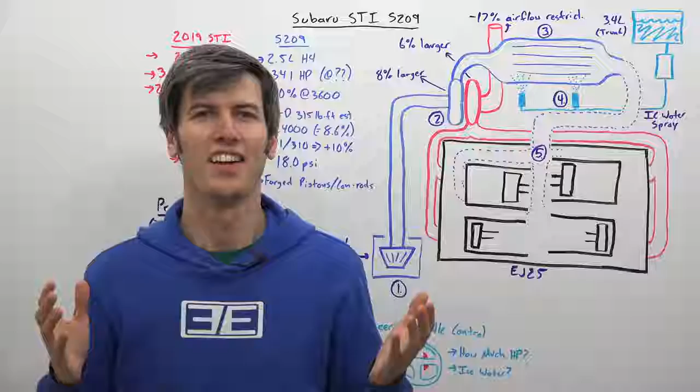In this video we are talking about the Subaru STI S209. Finally the US market gets one of the good ones. This is the first time an S-Line product has been made exclusively for the US market. There's going to be about 200 of these made for the US market, Subaru STI S209.

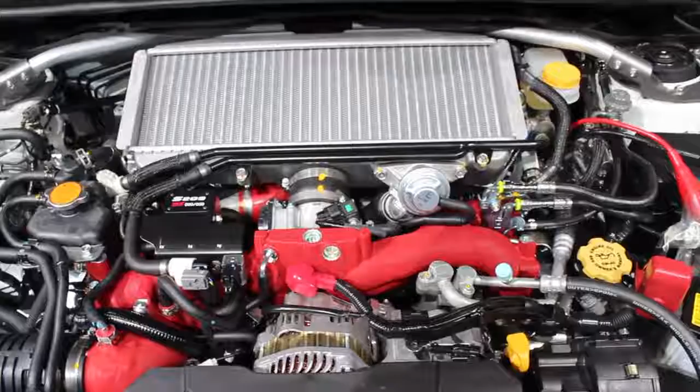In this video, we're going to be talking about how the engine works, what changes they've made with it, and also getting into its water injection system for the intercooler, which is a pretty neat little thing that they did. It's also something that they did in the 2004 to 2007 Subaru STI. So cool that they have brought it back for this special edition S-Line S209.

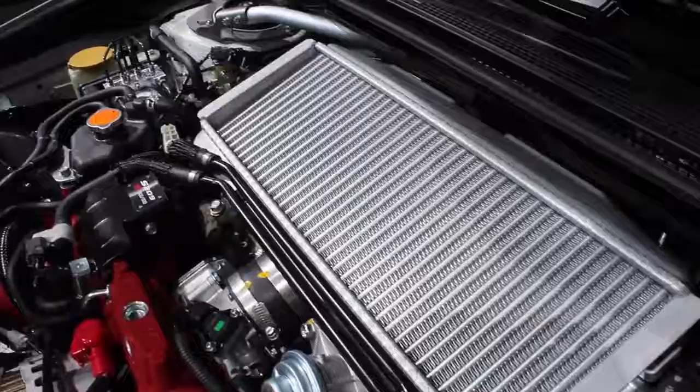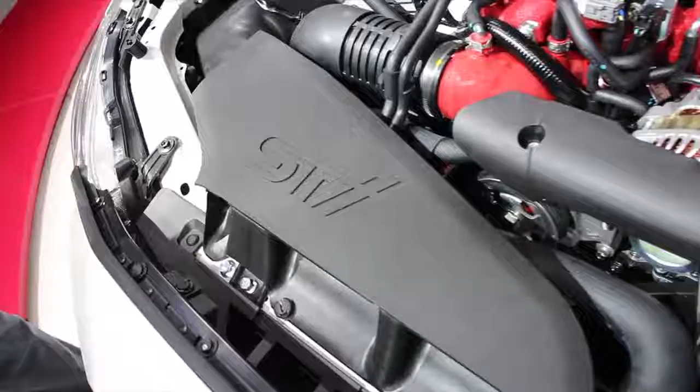The engine is based on the same EJ25 platform. You've likely formed an opinion about it. The engine has been around for quite some time, but of course it is that 2.5 liter boxer engine, and you've got your 4 cylinders right here as you can see, but they have made some significant changes to this engine. So up at the front you've got a conical air filter and a new induction box.

That leads you back to a compressor which is now 8% larger. You also have a 6% larger turbine, and out the exhaust the mufflers have a 17% reduction in airflow restriction. And they've also, of course, added this water injection system. After passing through that intercooler, the air is distributed in the intake manifold between the 4 cylinders.

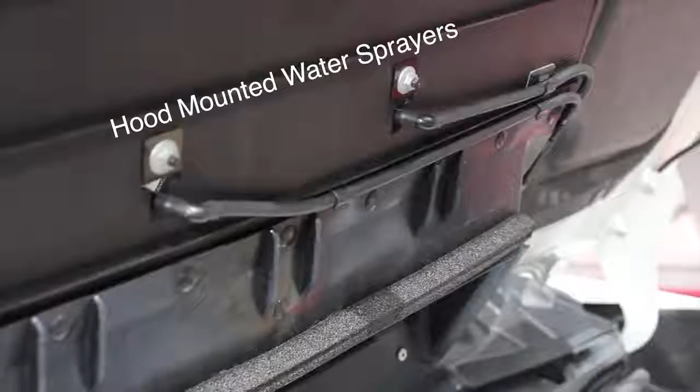Comparing the specs between the base 2019 STI and the S209, both of them, of course, have the 2.5 liter boxer 4-cylinder engine. However, the 2019 STI is at 310 horsepower at 6,000 RPM, the S209 with 341 horsepower, an additional 10%, or 31 horsepower. They have not yet provided at what RPM that will be at. I will get into that in just a second.

The 2019 STI is at 290 pound-feet from 4,000 RPM to 5,200 RPM. And the only thing we have learned so far about the S209 is that it has an increase in the mid-range of about 10% at 3,600 RPM.

Now, Car and Driver has said that Subaru estimates the peak torque for the S209 will be 315 pound-feet, and if we were to assume that this was at 4,000 RPM, that'd be an increase of about 8.6%, so somewhat in line with what Subaru has stated of 10% at 3,600 RPM.

And then, of course, the 341 horsepower divided by the 310, giving us an increase of 10% power. So I might guess that, if the torque does taper off towards that higher RPM, then we may see this 341 horsepower at a slightly higher RPM than 6,000.

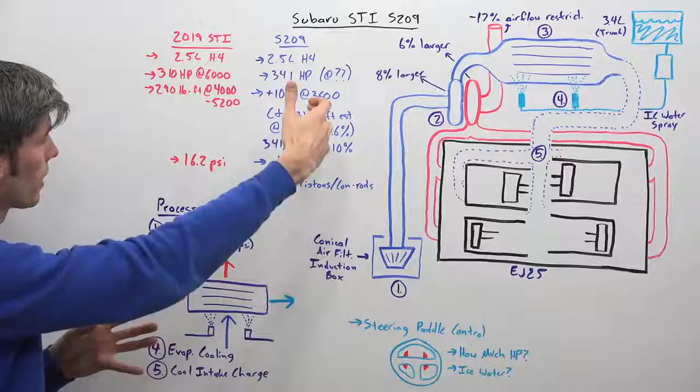Now, how is it creating this additional power? Well, part of it is through using this larger turbocharger and having more boost. So it's running at 18 psi versus 16.2 for the 2019 STI. And another big benefit that the S209 has is that it has forged pistons and forged connecting rods, so not only are they lighter, but they are also significantly stronger.

All right, so let's chat about the intercooler water spray, because this is quite neat. The process goes: you've got your air, it comes in that filter up front, it's then compressed by the turbocharger, adds 18 psi of pressure to that air over atmospheric. That air is, of course, then heated up as it has been compressed from that compressor and then travels into your intercooler.

An interesting thing that Subaru does with their intercoolers is placing them up top, using an air-to-air intercooler. This way they get some of the benefits of an air-to-water intercooler and some of an air-to-air intercooler. Placement for air-to-water intercoolers is very good because you can put it back in the engine, and as you can see, the air comes in through this intake, passes into the turbocharger, and then immediately can be directed into that intercooler above the engine, rather than routing that air all the way back to the front. This helps reduce turbo lag by shortening the path that air has to travel.

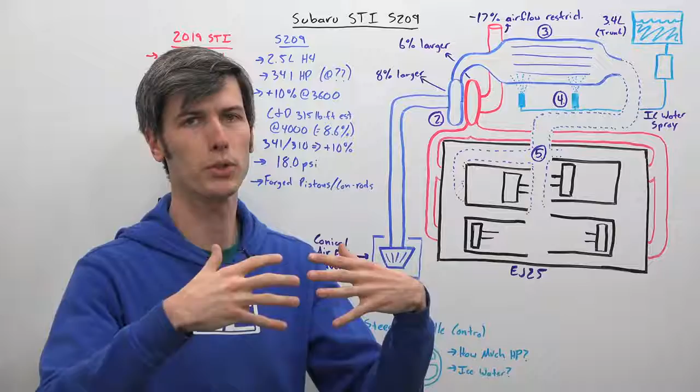You also have the efficiency benefits of an air-to-air intercooler. Even though it's not at the front of the engine, which would be ideal from an efficiency standpoint, you're still reliant on ambient air to cool that. So the minimum air temperature you could get would be ambient air, versus an air-to-water intercooler system, where your minimum temperature would be dependent on the water temperature, which would be slightly higher than ambient.

That compressed air is cooled as it travels through this intercooler, and then you have a driver-controlled option, a paddle on the steering wheel, to spray water onto the intercooler and use evaporative cooling to help bring down that intake temperature even lower. So if you're looking at your hot air going into the intercooler, you have cool ambient air going across the intercooler, which is then being heated up.

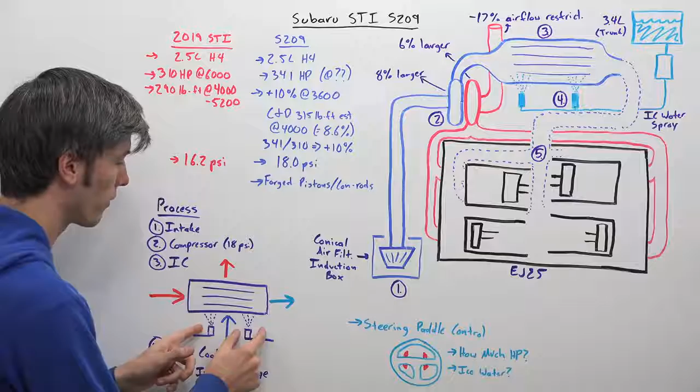You also have these two water injectors spraying water onto the intercooler. Through evaporative cooling, the heat of that intake charge heats up that water and evaporates it away, cooling the air even further. So you bring down that air temperature and distribute it into the intake manifold between the cylinders, sending in a nice, cool, dense, oxygen-rich charge, because you've improved the density by dropping down the temperature, so you can inject more fuel and thus make more power.

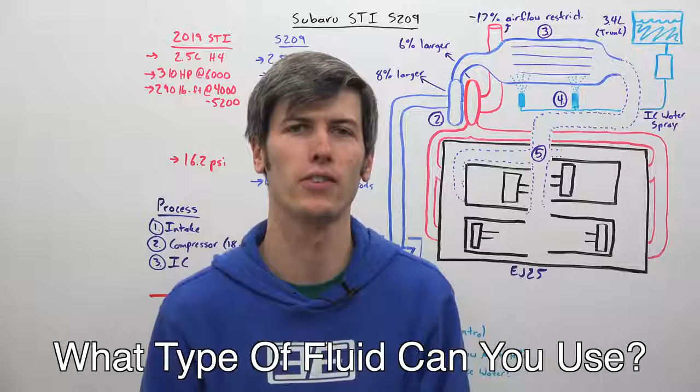I had a few questions about this system, so I reached out to Subaru to learn more. The first was, what type of fluid can you use with this system? Subaru plans for you to be able to use just any old regular water. I asked about this, and they said STI is looking into the fact that every state has differing water quality, and it seems they do want to let you use whatever water you want, though if you go back and look at the 2007 STI Owner's Manual, it does specify that you only use pure water. My next question was, what happens to the system at temperatures below freezing?

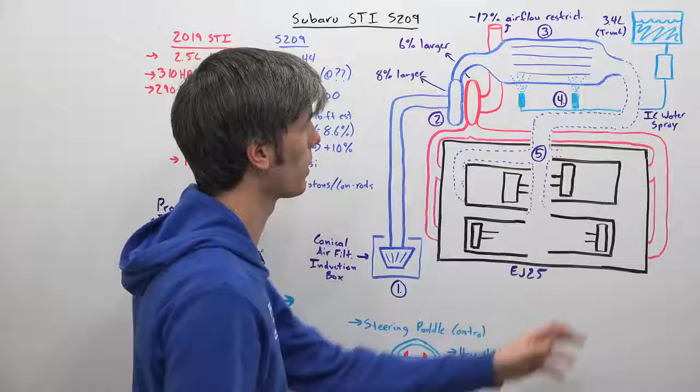The convenient thing about this is, if you're driving in temperatures below freezing, you don't need the system to work, because your ambient air is going to be so cold that your intercooler is going to be very efficient. That cold ambient air is going to be able to drop that intake charge temperature quite a bit, so you don't need to rely on this water cooling system in order for that peak performance to happen. That's the good news about it.

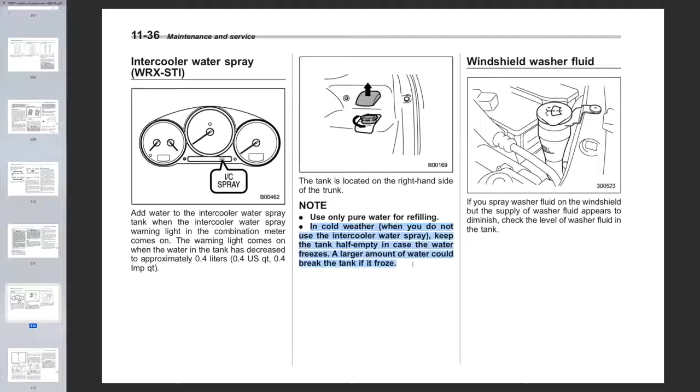As far as precautions, Subaru says you'll want to keep the tank half empty, half full for the optimists out there, so there's plenty of room for that water to expand. They said that if you use more than a half full tank of water, you could actually crack the case that the water is sitting in. So you want to make sure it's at just half full if temperatures are getting very cold. Also, the lines for the water injectors are rubber, so they do have the ability to expand if that water within them were to freeze.

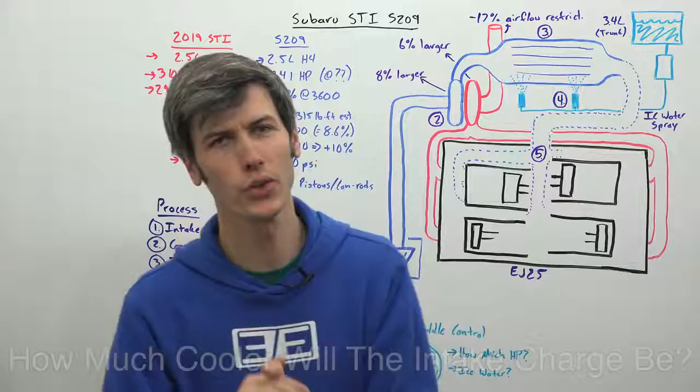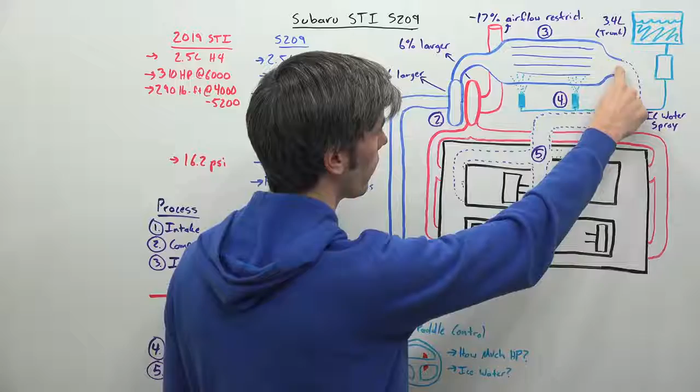How much cooler will the intercooler spray actually cool down that intake charge? I don't have a definite answer, but Subaru told me they were targeting a drop of 10 degrees Celsius. So if the water was on, the temperature exiting the intercooler would be 10 degrees Celsius cooler than without the spray system.

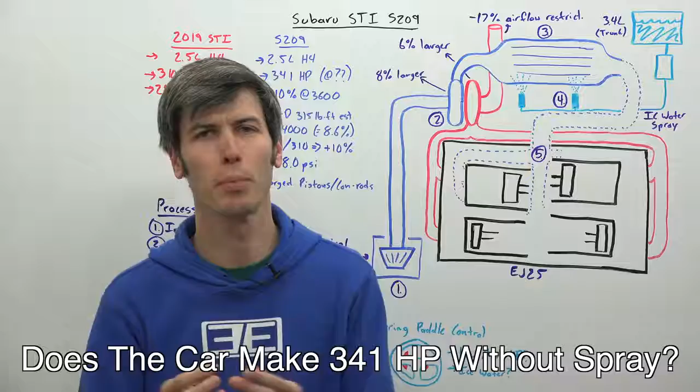Next, will the car be rated for 341 horsepower without the intercooler spray? The answer is no, and this is pretty interesting. It comes down to how the testing is done in certifying an engine for its horsepower rating.

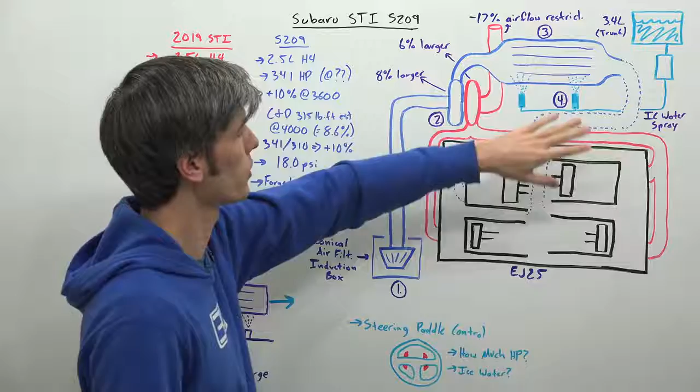You might be thinking, wait a minute, if in cold temperatures the car can make peak power because ambient temperatures are low enough that you don't need the water spray system, then why would you see an increase in performance using the intercooler spray for the published power numbers?

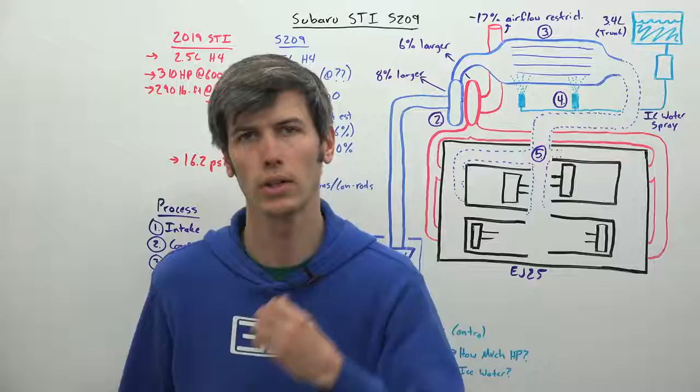When engines are certified for their power using SAE standard J1349, the testing is done at 77 degrees Fahrenheit, or 25 degrees Celsius. At this temperature, the intercooler spray actually has a meaningful effect in increasing horsepower. Subaru didn't say how much, but they said without the intercooler spray, it would be rated for slightly less horsepower.

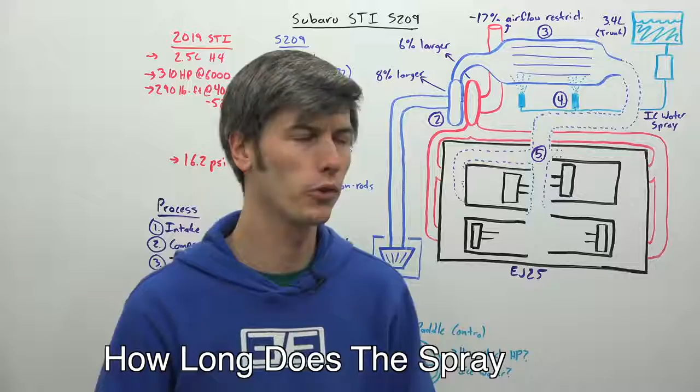Finally, how long does the water spray last? Subaru said there's a 3.4 liter tank placed in the trunk, with a water pump sending water up to the injectors. They said it will last 5.5 minutes, or 330 seconds, as the maximum operational duration for this system.

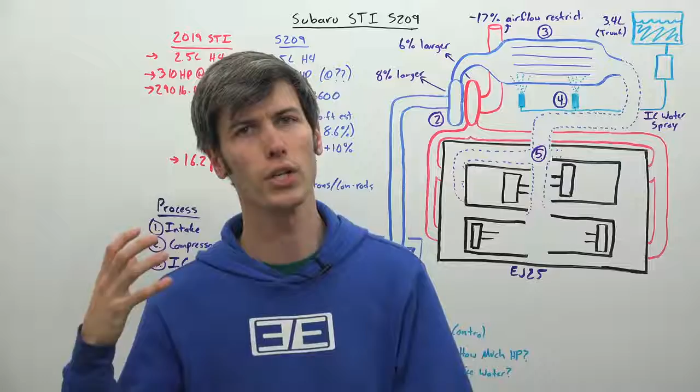If you do the math and assume that 5.5 minutes drains the entire tank, that means you're injecting about a liter of water every 100 seconds.

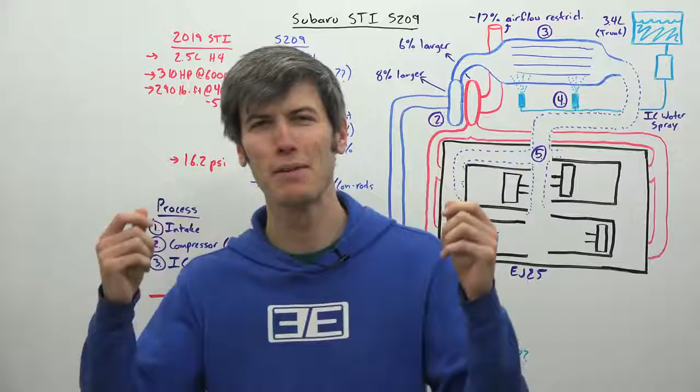On the car, you've got little paddle shifters. Of course, it's a manual transmission, so these aren't shifters — they're actually for controlling the intercooler water spray. I think that's such a cool thing. Anytime you can push a button on your steering wheel that provides more power is quite neat in my book, even though I don't think the overall difference in power is going to be all that significant.

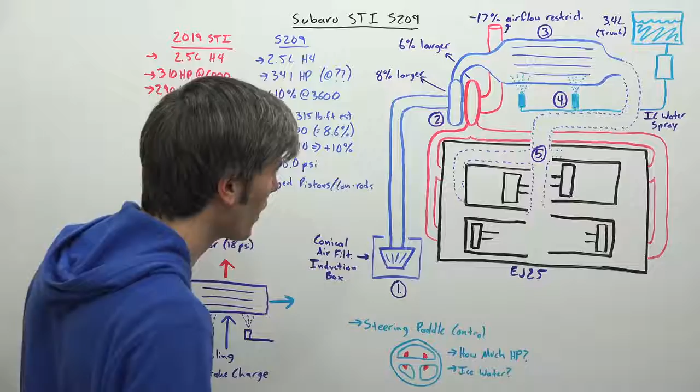If I were to take a guess, based on the fact that the car has 341 horsepower and that they're targeting a 10 degree Celsius reduction in air temperature, I'd say the system probably won't give more than 10 horsepower when it's being used. So not something you'd really feel, but still a real, actual difference — you would actually produce more power, so it's a cool thing.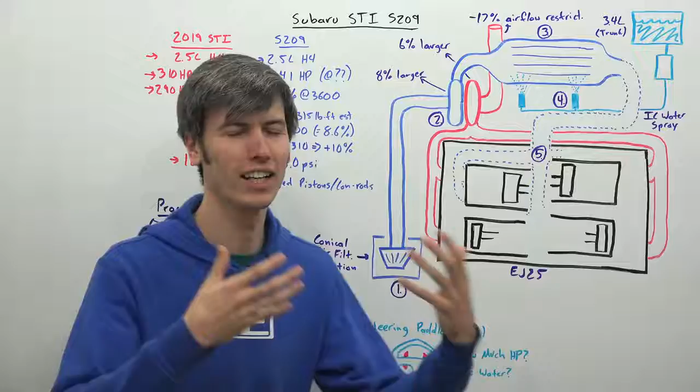It's kind of an engaging thing with the driver, and a throwback to the '04 to '07 STIs, which I think is very cool.

And you know, let's say you're going out on a track day — you could perhaps put some ice water in that tank so you had ice cold water spraying on the intercooler, bringing temperatures down even more and making even more power doing so. So quite cool, kind of playing around with the system, the driver engagement involved with it.